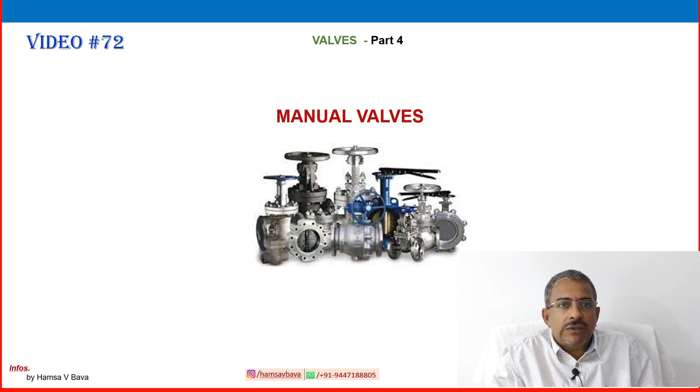We are continuing our sessions on valves. In this video, we are discussing some more manual valves, mainly linear motion valves. I hope you have seen my last video on manual valves, rotary type valves. In this video, we are discussing manual valves, basically mainly on linear motion.

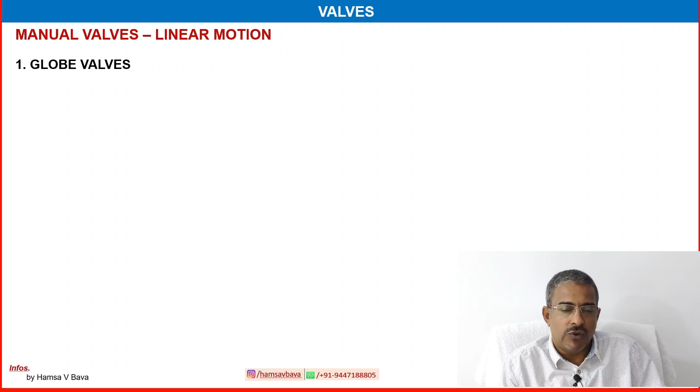In linear motion manual valves, the first valve is the globe valve. Globe valve is a linear motion valve characterized by a body with a longer face to face that accommodates flow passages sufficiently long enough to ensure smooth flow through the valve without any sharp turn.

Linear motion means the valve is moving from top to bottom. The stem, hand wheel, and closing/opening flow element move up and down like this. The flow is entering from here, taking a turn, and going here. The flow element is sitting in the seat. This is a simple representation of a globe valve, a linear motion valve. We can see some more information on globe valves.

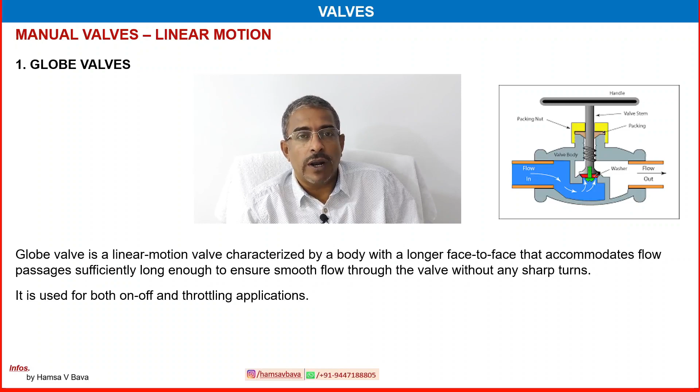It is used for both on-off and throttling application. That is very important. Isolation purpose is also served by this valve, but its major contribution is in the control valve area. This globe valve is used regularly. More globe valve application is in the throttling area.

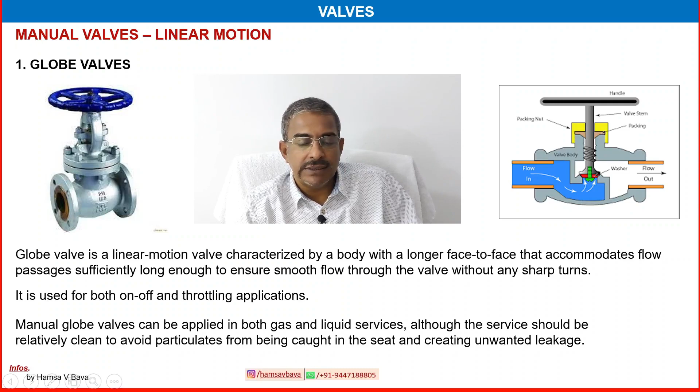Manual globe valves can be applied in both gas and liquid service, so application in both cases. Although, service should be relatively clean to avoid particulates from being caught in the seat and creating unwanted leakage. That's the only limitation. Slurry and too much polluted flow may create problems in the opening and flow area. Otherwise, for relatively clean liquids and gases, this globe valve is perfectly okay.

Continuing on globe valves, common applications include on-off and flow control, frequent stroking, vacuum, and wide temperature extremes. In all these cases, globe valve can be used and application is not limited.

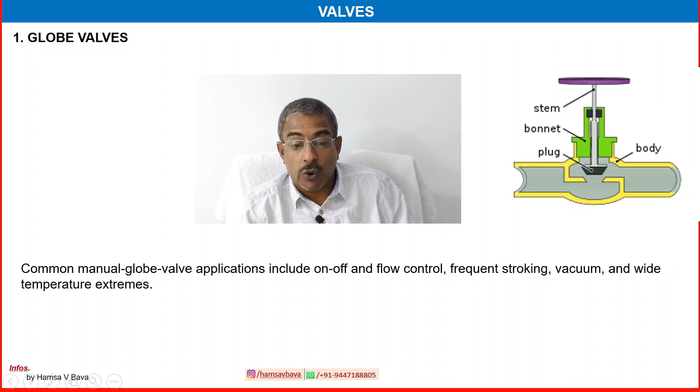Although the globe valve body design can handle high pressure classes up to around ANSI class 2500, manual globe valves are usually applied to lower pressure applications because of the thrust limitation of the hand operator. That's another limitation - because of the hand operator thrust limitation, it is limited to low pressure application.

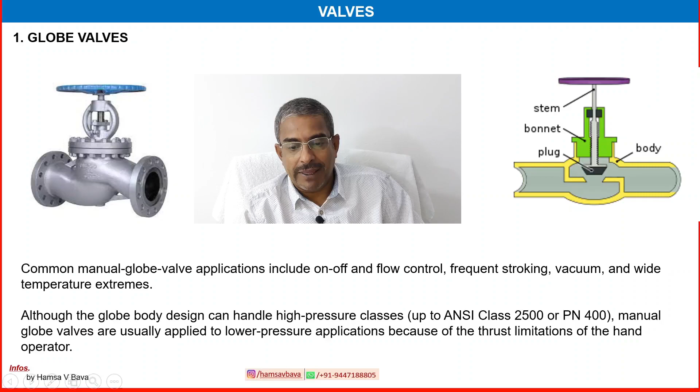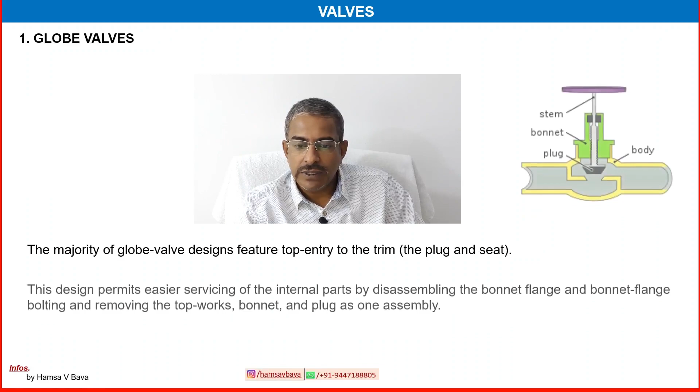The majority of globe valve designs feature top entry to the trim, from top to bottom: plug and seat. Here it is - plug and seat, stem is there, plug is there, this is the seating area. This design permits easier servicing of the internal parts by disassembling the bonnet flange and bolting, and removing the top works - bonnet and plug - as one assembly.

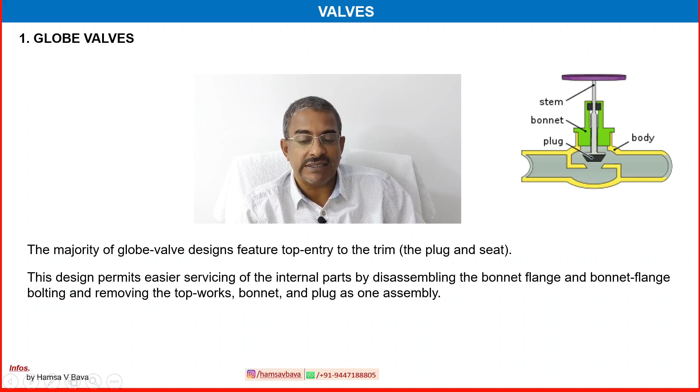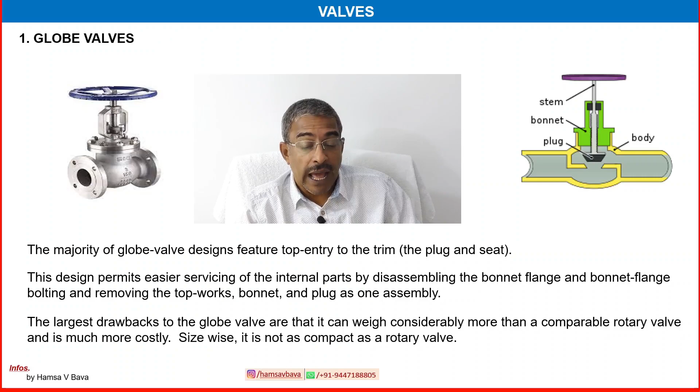The largest drawback of globe valves is that they can weigh considerably more than a comparable rotary valve and are much more costly. Size-wise, it is not as compact as a rotary valve. That is one limitation, but not a big one. Application-wise, globe valves are largely used in oil and gas operations.

Second among linear operation manual valves is the gate valve, the most commonly used isolation valve, used in both liquid and gas applications, high pressure and low pressure application. In all cases, all scenarios, gate valves are commonly used.

Overall, the simplicity of the gate valve design and its application to a large number of general low pressure drop services makes it one of the most common valves in use today. Because of its simplicity and application to a large number of general and low pressure drop services - for many reasons - gate valves are the most commonly used valve in the industry.

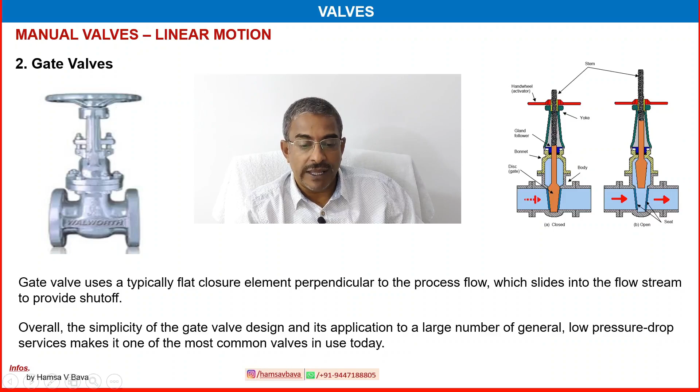It can be applied in both liquid and gas service, although it's mostly used in liquid services. So both cases apply, but the majority is used in liquid service.

The gate valve was designed primarily for on-off service, where the valve is operated infrequently. Basically, in oil and gas, from my experience, it is used as an isolation valve for on-off service on major lines, and not used as a throttling valve. It is specially designed for slurries with entrained solids, granules, and powders, and for cryogenic and vacuum service. Most of the time, the gate valve is suitable for this use.

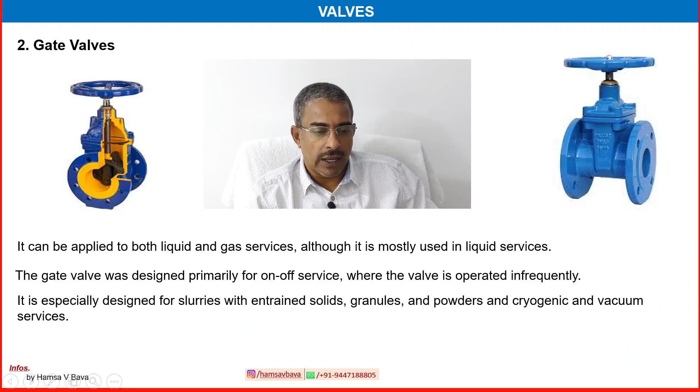As an on-off block valve, it can be designed for full area flow to minimize the pressure drop and allow the passage of a pipe cleaning pig.

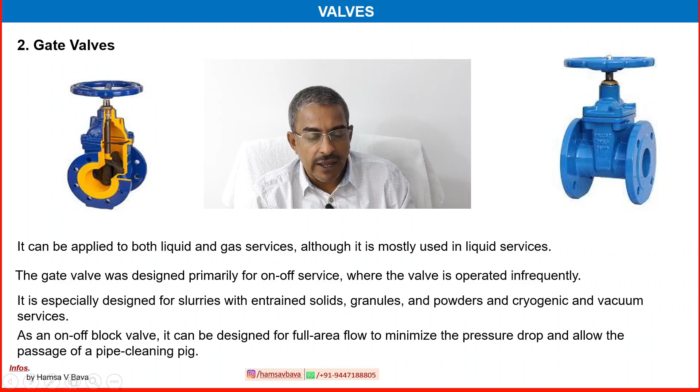That is, in the opening area, you get the complete benefit of the opening area, so the pig also can travel through the flow path.

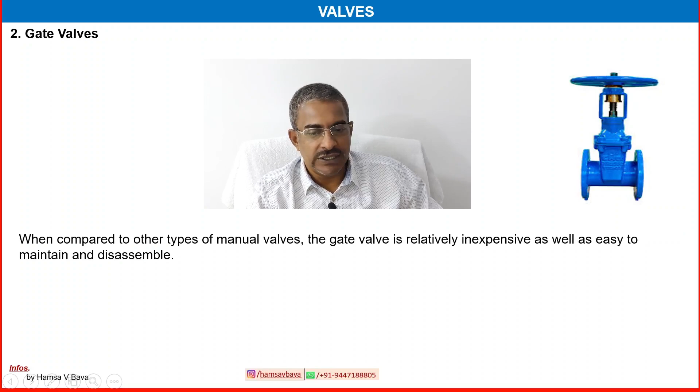Gate valves continuing. When compared to other types of manual valves, the gate valve is relatively inexpensive as well as easy to maintain and disassemble. This is also one of the important properties of gate valves.

Manual linear type valve is most commonly applied in simple on-off services as a block valve, also called isolation valve. You can see the P&ID or visit your plant area to see that many gate valves are used as an isolation valve or block valve.

Gate valves do have some limitations. Gate valves do not handle throttling applications well because they provide inadequate control characteristics, so it is very limited in throttling application like a control valve.

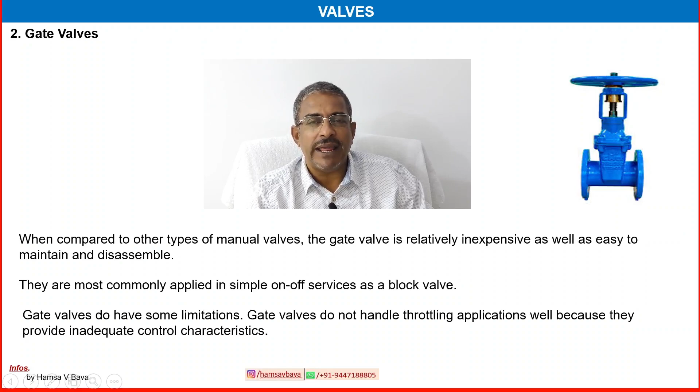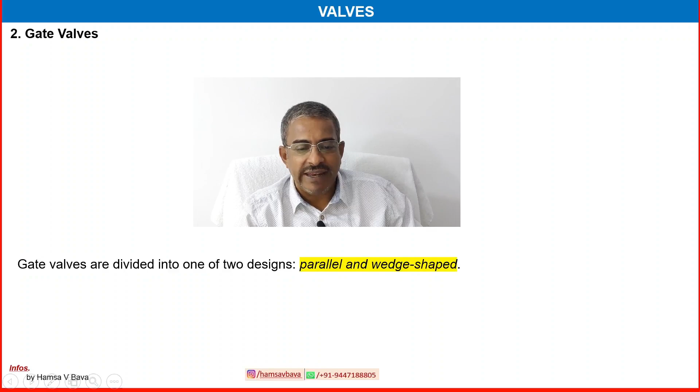Some more information available on gate valves. Gate valves are divided into two designs: parallel and wedge shaped. This design is actually the gate itself, designed in two ways, parallel and wedge shape.

Parallel means straight and parallel. Wedge means the upper side diameter is more and the bottom side diameter is less. That is wedge shaped.

The parallel gate valve uses a flat disc. Flat disc means straight, both upper side and lower side are the same diameter dimension. The flat disc gate has the closure element that fits between two parallel seats, an upstream seat and a downstream seat.

For the most part, the application of a parallel gate valve is limited to low pressure drop and low pressures, and where tight shutoff is not an important prerequisite. So that means where tight shutoff is not required, we can refer to this parallel type gate valve.

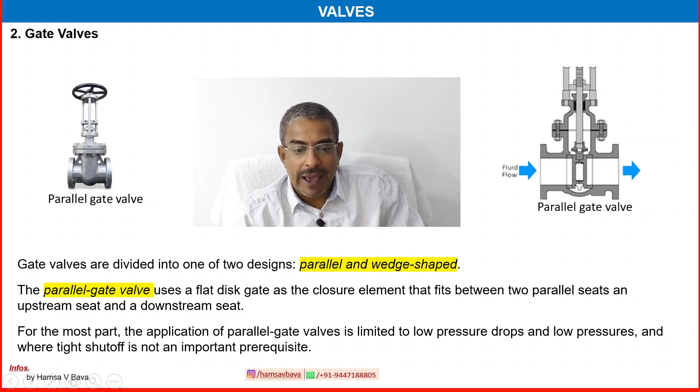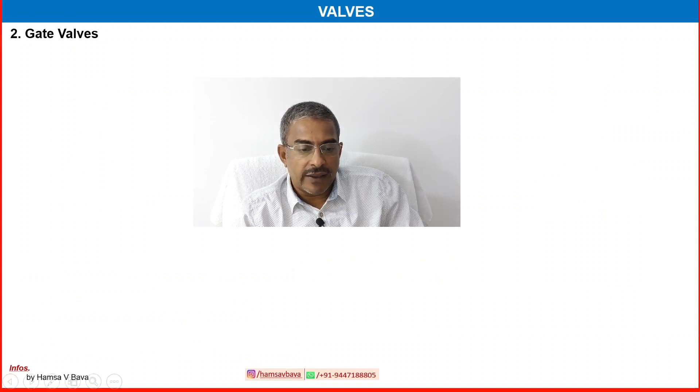So it fits inside the seat properly, achieving tight shutoff even against high pressure. That is the importance of the wedge shaped gate valve.

So there are two types of gate valves: parallel type closure element and wedge shaped closure element. The difference is low pressure and high pressure and tight shutoff.

Gate valves are commonly found in sizes of 2 to 12 inch in ANSI class 150, although larger sizes are sometimes custom designed. So application is limited up to class 150.

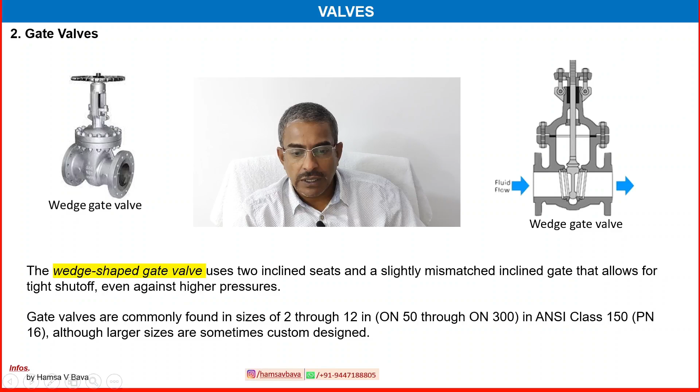Some more design details of the gate valve. The gate is attached to the manual operator through the gate stem, which may be either a fixed or rising stem to the gate, or a threaded non-rising stem. So the gate itself, this is the gate.

The gate itself design is of two types. One is where the stem is moving up and down, so the gate and stem are a single piece, moving up and down while the valve is opening and closing.

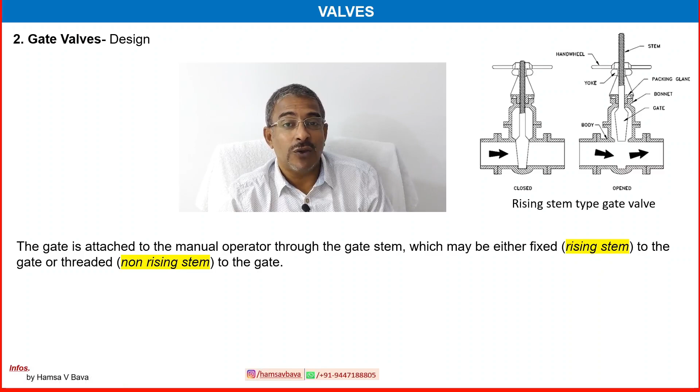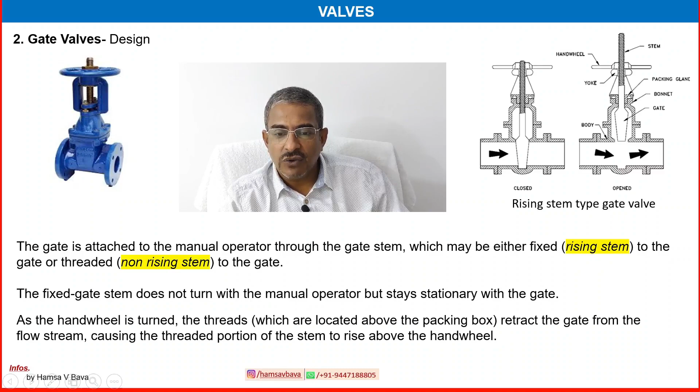Just visit the field to finally identify where rising stem and non-rising stem gate valves are being used. The fixed gate stem does not turn with the manual operator but stays stationary with the gate. As the hand wheel is turned, the threads located above the packing box retract the gate from the flow stream, causing the threaded portion of the stem to rise above the hand wheel. So it moves up when opening, and down when closing.

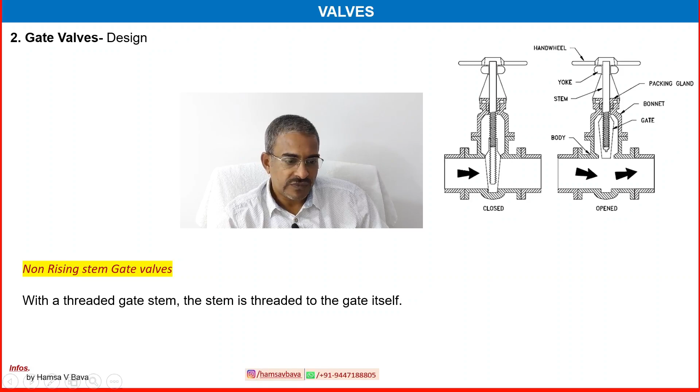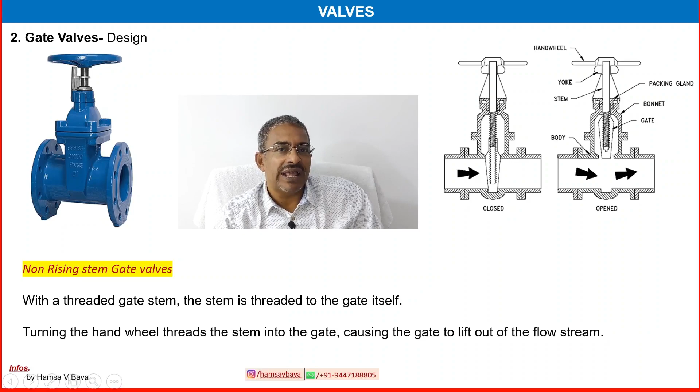With a threaded gate stem, the stem is threaded to the gate itself; turning the hand wheel threads the stem into the gate, causing the gate to lift out of the flow stream. So that is rising stem gate valve and non-rising stem gate valve. Some more information on the operation side of the gate valve.

With most applications, unless the flow rate is minimal, keeping the gate valve in a throttling position mid-stroke results in flutter of the gate as well as vibration and unnecessary wear. So in a throttling application normally it is not used, but sometimes it is used in mid-stroke, the partially open throttling position. This results in flutter of the gate, vibration and unnecessary wear.

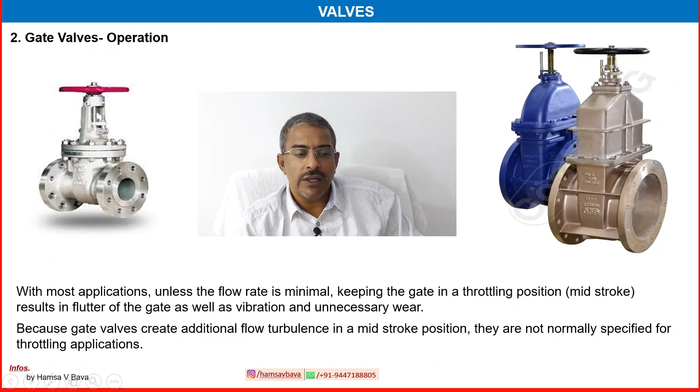So try to avoid or minimize throttling applications using gate valves. Because gate valves create additional flow turbulence in the mid-stroke position, they are not normally specified for throttling applications. It's already mentioned. So for throttling applications, the gate valve is not suitable.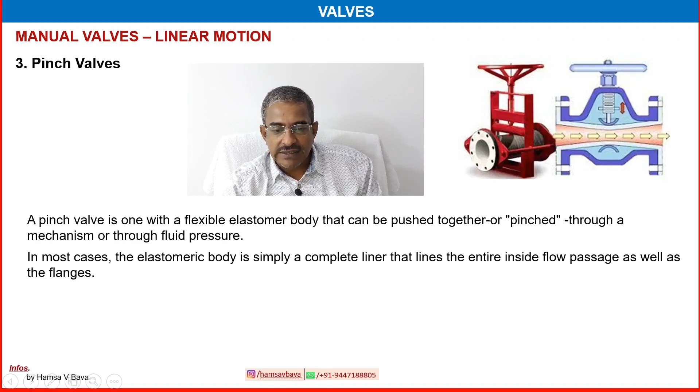A pinch valve is one with a flexible elastomer body that can be pushed together or pinched through a mechanism or through fluid pressure. You can see this picture, a pictorial representation of a pinch valve. In most cases, the elastomeric body is simply a complete liner that lines the entire inside flow passage as well as the flanges. Here it is inside the body. We call it the liner; this closure element is called the liner.

The liner keeps all moving parts outside the flow stream. Therefore, these non-wetted parts can be made from less expensive material such as carbon steel. So it is less expensive. The main application is in corrosive chemical flow. This is another picture of a pinch valve. The fluid is completely contained inside the liner.

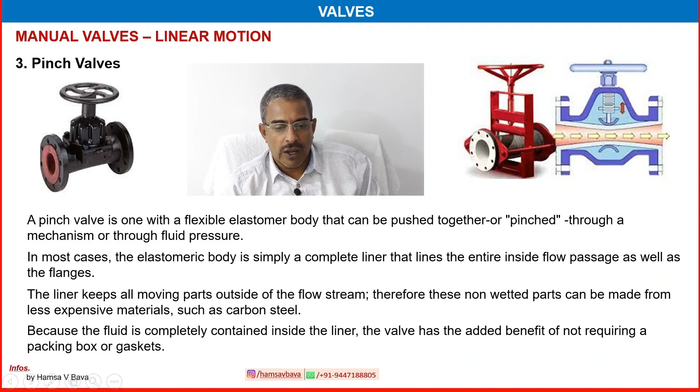The valve has an added benefit of not requiring a packing box or gasket. There is no way of leaking outside the flow path. In other valves, a packing box, stuffing box and gasket should be there, but in this pinch valve there is no need. So that is a big advantage of the pinch valve. But the application is limited to corrosive, low pressure areas, very limited. It is not a commonly used valve.

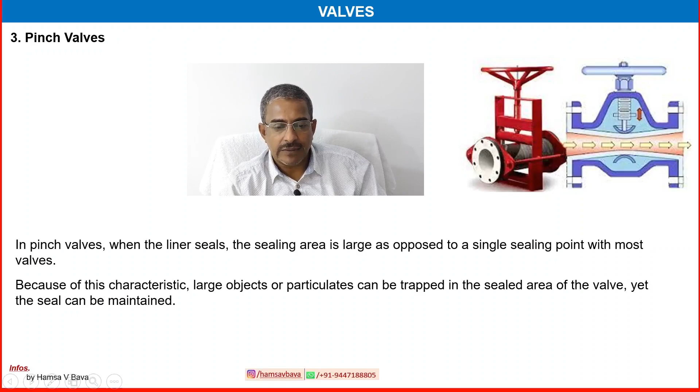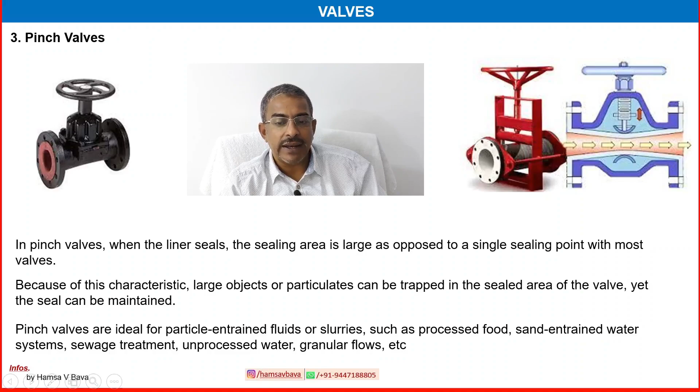In pinch valves, when the liner seals, the sealing area is large as opposed to a single sealing point with most valves. Because of this, large objects or particulates can be trapped in the sealed area of the valve, yet the seal can be maintained. Pinch valves are ideal for particle-entrained fluids and slurries such as processed food, sand-entrained water systems, sewage treatment, unprocessed water, granular flows, etc. So there are many applications for the pinch valve.

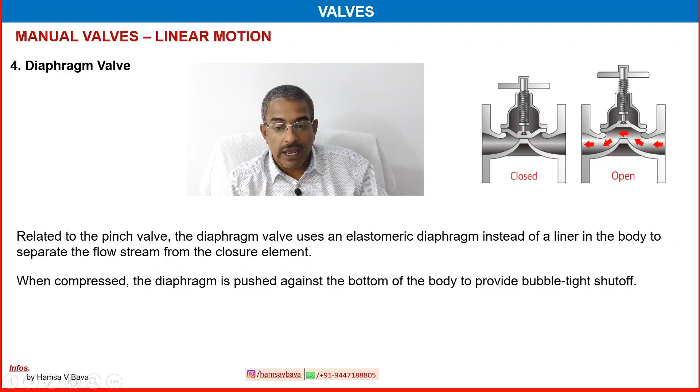Related to the pinch valve, the diaphragm valve uses an elastomeric diaphragm instead of the liner to separate the flow stream from the closure element. When compressed, the diaphragm is pushed against the bottom of the body to provide bubble tight shutoff. That is a very important word, bubble tight shutoff. It is a specialty valve used in corrosive and chemical applications. The closure element is not wetted by the process and therefore can be made from less expensive material in corrosive processes.

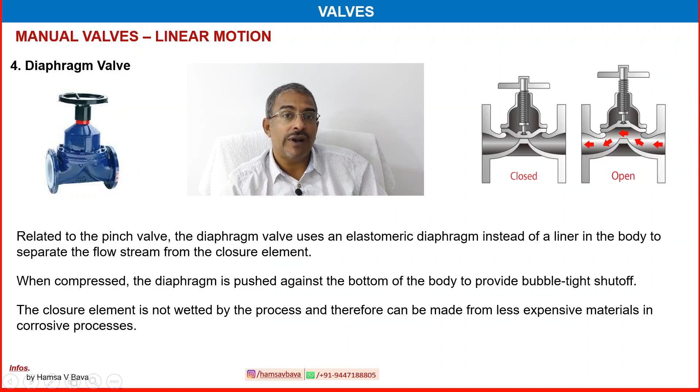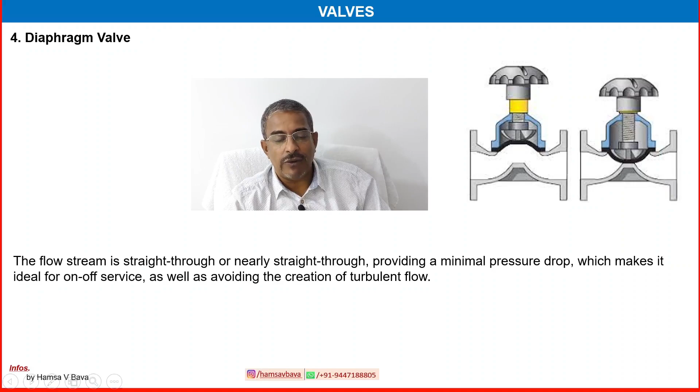The flow stream is straight through or nearly straight through, providing a minimal pressure drop, which makes it ideal for on-off service as well as avoiding the creation of turbulent flow. Its throttling application is very limited. It is regularly used as an on-off valve, but as a specialty valve in special cases.

Because the diaphragm is contained in a pressure-retaining body, a diaphragm valve is able to handle somewhat higher pressure than a pinch valve. That is important, higher pressure than a pinch valve. Although the overall pressure and temperature ratings depend upon the flexibility of the diaphragm material, or reinforcement of the diaphragm. The temperature and pressure application is dependent on the diaphragm.

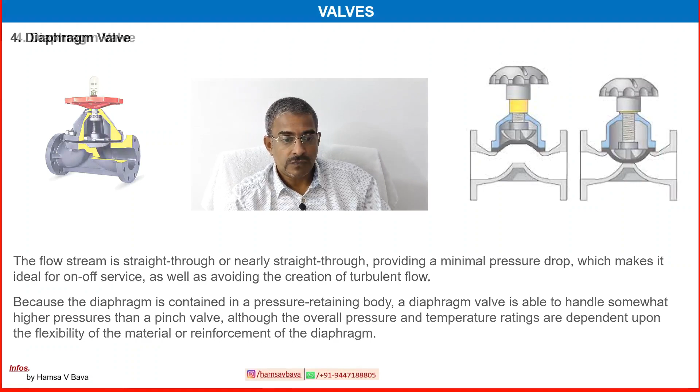Diaphragm valves have applications similar to pinch valves. The resilience of the diaphragm allows it to seal around particulates in the fluid, making it ideal for service with slurry, processed food and solid-entrained fluids. This is another picture of a diaphragm valve.

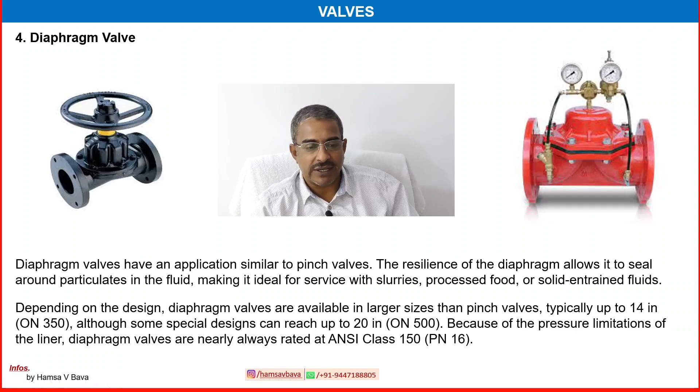Depending on the design, diaphragm valves are applicable in larger sizes than pinch valves, typically up to 14 inch or DN 350, although some special designs can go up to DN 500 or 20 inch. Because of the pressure limitation, diaphragm valves are nearly always rated ANSI class 150. It's limited up to that pressure. So that is the design part. ANSI is based on classification.

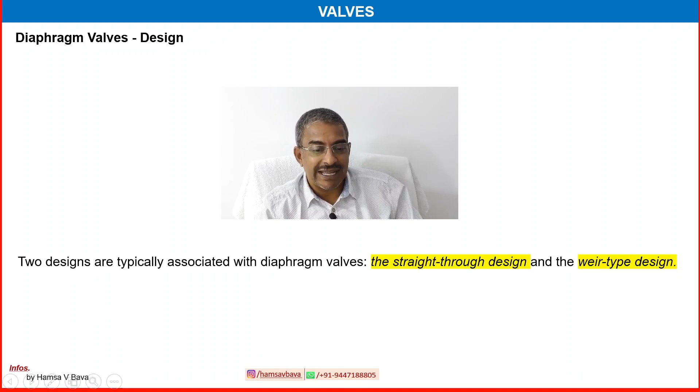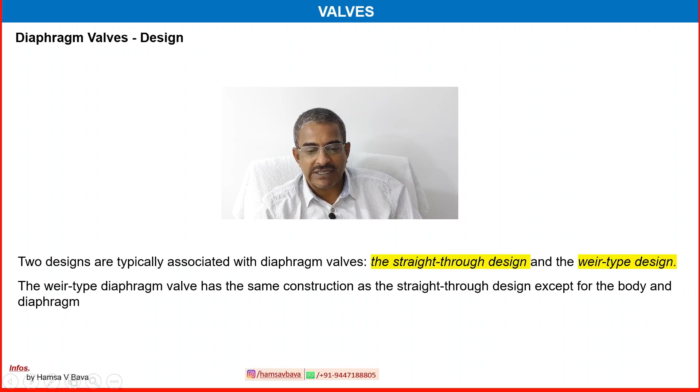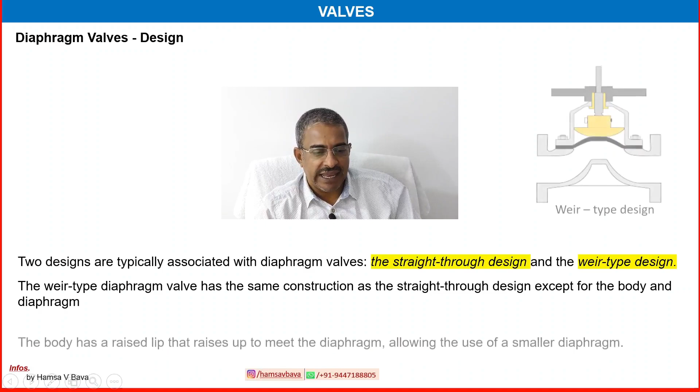Some more information is available on the diaphragm valve. Two designs are typically associated with the diaphragm valve: the straight through design and the weir type design. The weir type diaphragm valve has the same construction as the straight through except the body and diaphragm. So both are almost the same concept, but there is a very minor difference in the design. Look at this one, the weir type design.

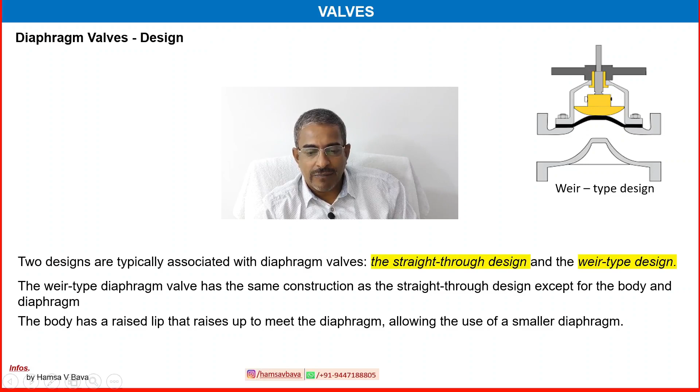A flexible diaphragm is there. The lower body is slightly raised on the upper side, giving a tight shut off. The body has a raised lip, that is the weir, that rises to meet the diaphragm, allowing the use of a smaller diaphragm. The body is designed to be self-draining, which makes it ideal for food processing applications.

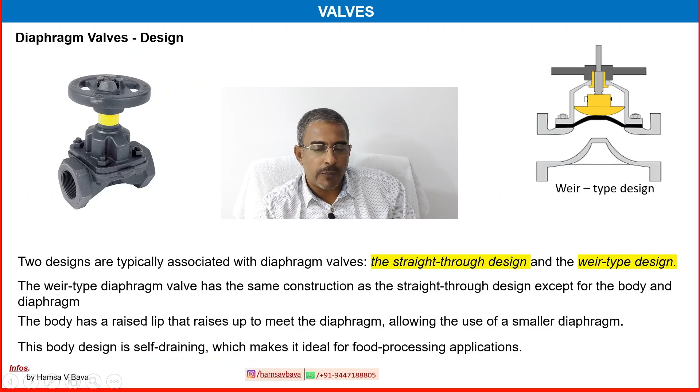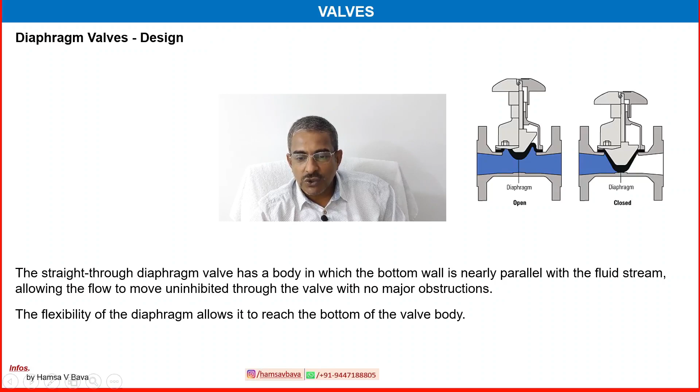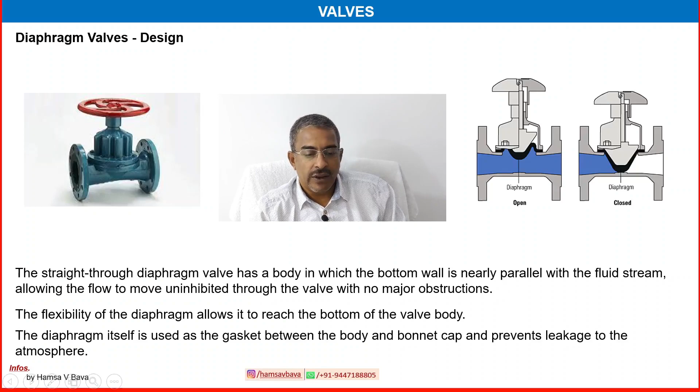The flexibility of the diaphragm allows it to reach the bottom of the valve body. So the flexible diaphragm is reaching up to here, and the closure element design is slightly different. This is the picture of a diaphragm valve, straight through type. The diaphragm itself is used as the gasket between the body and bonnet cap, and prevents leakage to the atmosphere. There is no other gasket used here like in a gate valve or globe valve.

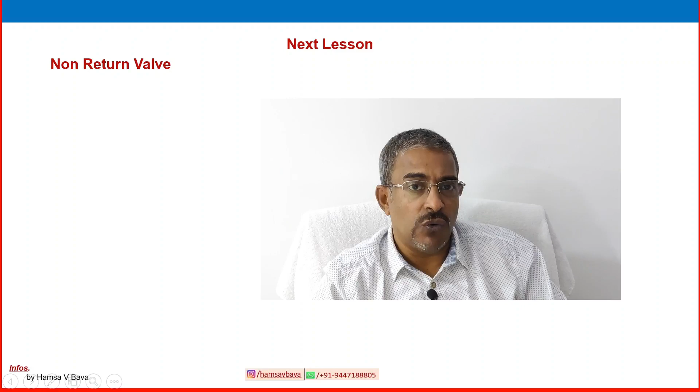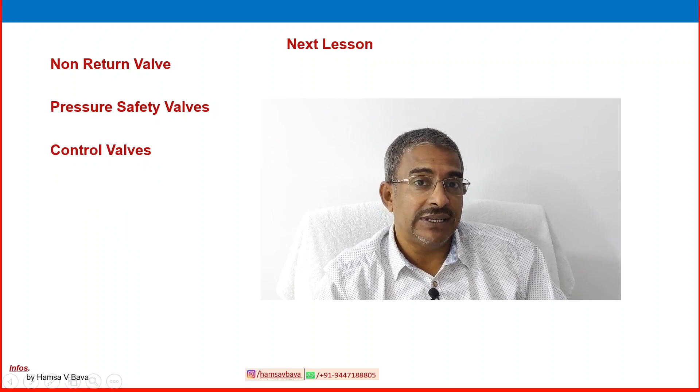Thanks for watching this video. Next lessons are coming. We have covered most of the valve classification, design, characterization, linear type and rotary type manual valves, etc. The next session or video covers non-return valves, check valves, then pressure safety valves. That lesson is pending. Control valves also, which are very important valves in the process industry. These are the next few coming lessons or videos.